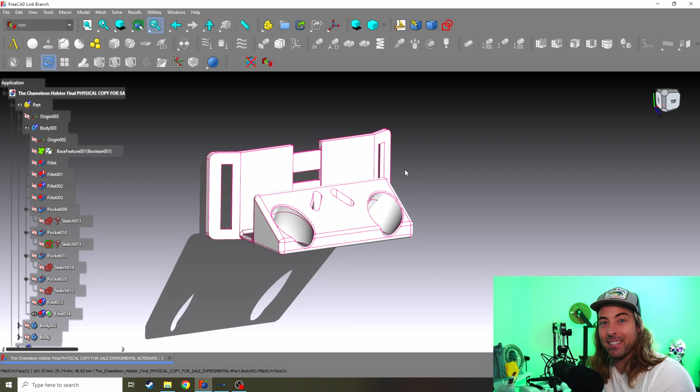Going over my FreeCAD document here. This is... this is a mess, is what it is.

Now, when you go into FreeCAD, you're going to have all these shapes, but let me see if I can... this is kind of like a finished concept. Your FreeCAD is going to look a little different. This is kind of a customized version with certain add-ons, you can see I have.

I make multiple copies as I go, and I'll explain that in a second. I want to make this as brief as possible. There's nothing I can do to say, hey, this is how I do it, just copy this.

You have to learn how to use your program, whatever you're going to use. If you're like an artist and you like CAD style stuff, but the CAD is a little too much for you, there's Plasticity. A lot of people like that. And like I said, there's Blender and so many options.

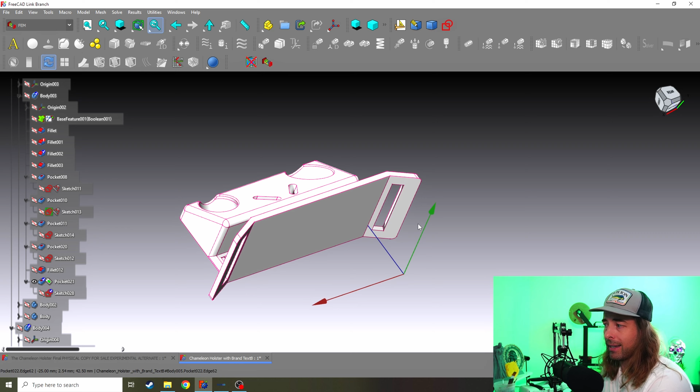So go and check out what's out there. Go look at some videos. But in CAD, this is how I went about it. I knew that I needed a shape.

All great things start out very simple. I played around with the front end first and then the back end. I kind of really don't understand how I'm going to do it, I just start doing it, you know? That's how I work, I can't plan it out. If I plan it out, it's not going to happen because I get frustrated.

Then I added this angle here, and then I added the belt loop. It's as easy as that.

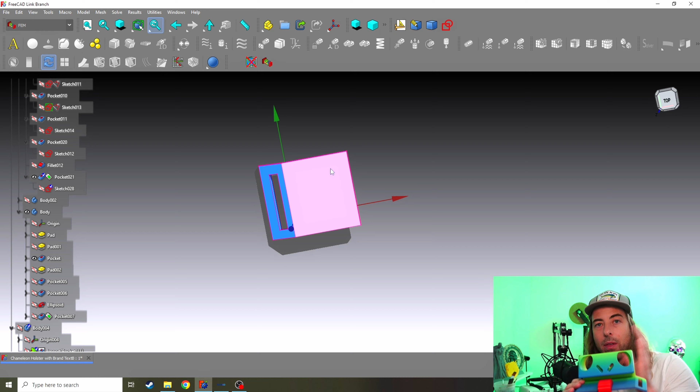When you're going to do something that's symmetrical, it's really easy. You only have to do half of it, okay? That's my message to you: do half of it, and then mirror that image, and you'll have an exact symmetrical product.

If you try to do it any other way, it gets a little complicated and you end up doing a lot of unnecessary work.

And that was my original first go at it. This isn't my first go, this document right here. This is probably like the third or fourth attempt. So this is what I did.

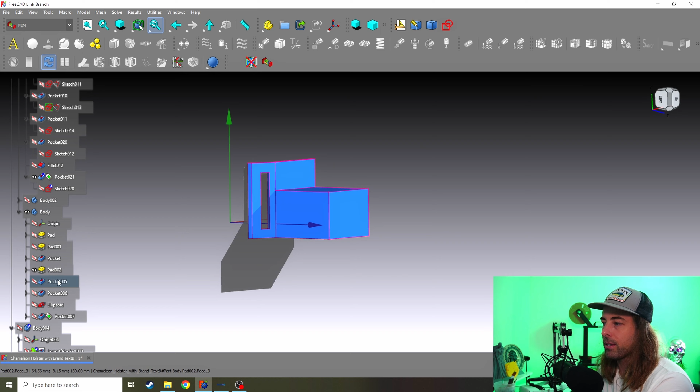I did half of it and then I started adding the block, okay? You can see the block on the side there. And then I added the pocket where I thought the smartphone could go.

All right, I just sketched over top of it, see the sketch right there? I didn't even put constraints on it, I just attached it to the edge.

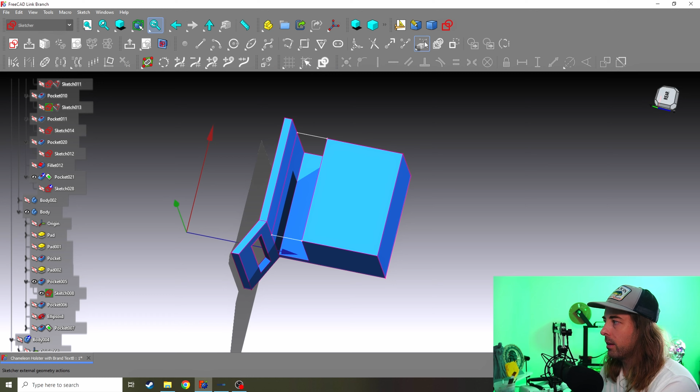There's something in the sketcher that you can use, let me see if I can bring it up. In the sketcher, you can attach to edges. Right here, the external geometry option right here.

And so I believe I used the edges and attached my sketch to these edges, and that's why it looks so perfect, but I didn't measure it. I didn't constrain it. I recommend you do, but sometimes I just run with it, you know? If it looks good, it prints good, then I don't care.

After that pocket was done, remember this is half, this is not the full length thing, it's going to have more reflected on the other side. I don't need the whole block, and it'll look stupid if it's a block.

In fact, I really wanted a round shape, but that's really annoying to print. Round things don't always print well, and you'll see that if you try to print cosplay helmets. When it gets towards the top, as it starts to round off, you'll get layers that kind of separate.

And then they'll fill those in with Bondo or whatever that stuff's called. And it kind of ruins your experience with 3D printing, because you want it to just do the whole thing, do the concept, and it's done, right? And you want it to just be one material, okay?

And so that was my goal, and that's why I decided to just make it kind of blocky. You can see it's not exactly, you know, a chameleon head per se, but it's kind of blocky. But when you're doing art and sculpture in general, you're just going for the idea of it—if people look at this, will they think that kind of looks like a lizard?

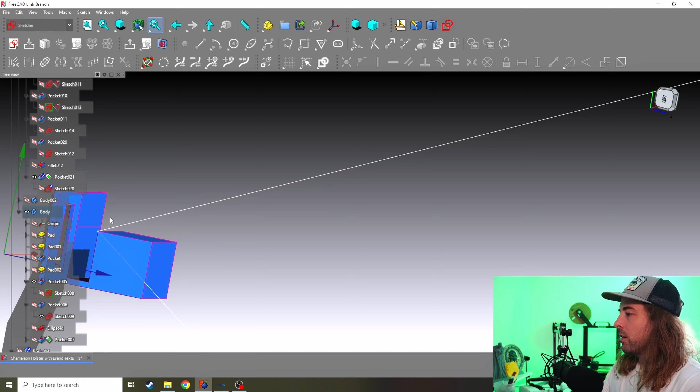What do you mean it doesn't look like a lizard? Of course it does. That's what I was going for, and I knew I could get away with it.

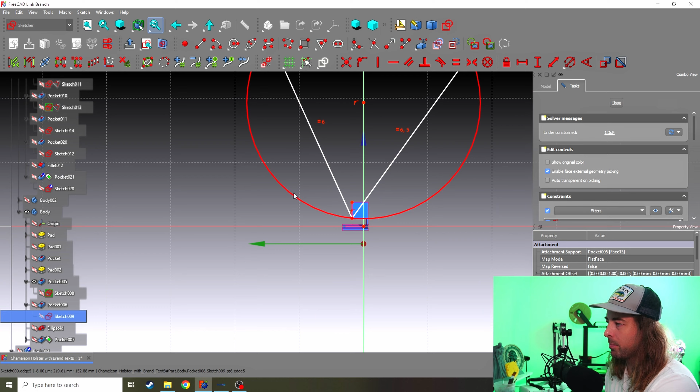So I made this giant triangle like this, and I used the point on this corner here to lock in my sketch. I use that as a reference, okay? Let me see if I can show this to you. If I double click on that sketch, there it goes, it opens it right back up. So there's the triangle, okay? This big triangle is what I used. It didn't have to be this big, you can shrink it, but like I said, I was just running with it.

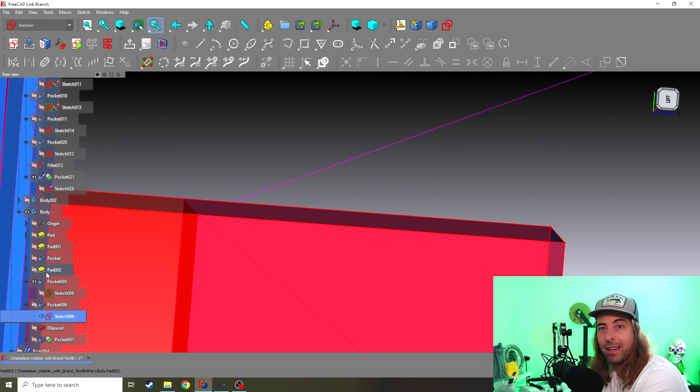So this triangle, and I figured I don't want it at a sharp angle at the bottom. I need a little bit at the bottom that I can use, and I don't want super sharp edges because in 3D printing that tends to cause things to peel up. They're really difficult to keep on the build plate. Even when you have glue, stuff happens. Fight me. So I left that like that, and then I pocketed it.

So you can see I do a lot of sketches, pads, and pockets. Those are my main tools in this program. So after the pocket, I had that sharp angle, and then I had a flat face there.

I added the hole here, okay? But this is not just a hole. If you look carefully, you'll notice it's an oval shape. And I needed that because if you look at the controller, that is an ellipsoid. It's an oval, a very tricky shape.

I had to make sure it could go in, but I also like how they designed it because it's a little bit thicker in the middle. So that means I knew that was my point of retention. All I had to do was make it so that it could go far enough that it doesn't hit this button, but it could go far enough and stop right there. So it's retained at the bottom, the bottom is too small to go past that point right there.

So I was working with this and with this. Now I did want it a little more, you know, at a, what's that called? A chamfered angle, or what's that called in gun terminology? A flared magwell, okay? If you have a flared magwell, you know how great those are, it makes it a lot easier to slide this thing.

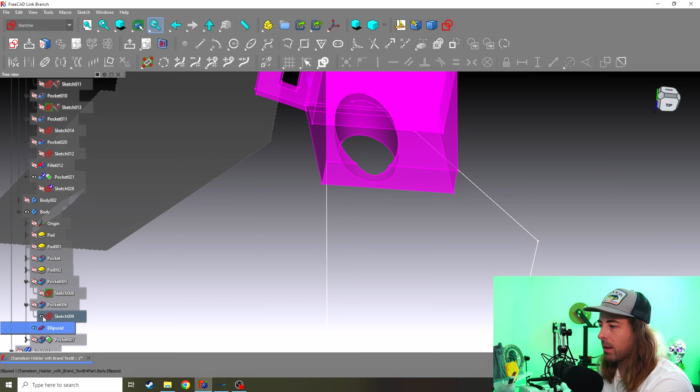So I was thinking of that, so I made it a little bit bigger than usual, and I imagine people not getting it perfectly right. So I made it a little wider, and actually I just guessed. I tried to measure it and it didn't work, so I just kind of guessed until I got it right.

You'll see my ellipsoid was a subtractive one. You can see the ellipsoid's right here, right? Now let me double click, there it is right there.

So in the part design workbench, and you're gonna have to learn all this stuff, whatever program you're using, you need to learn this is a subtractive feature, so it's a shape that it subtracts. And if it doesn't work, it's because you need to learn why it doesn't work. And that's on you, there's a lot of things going on.

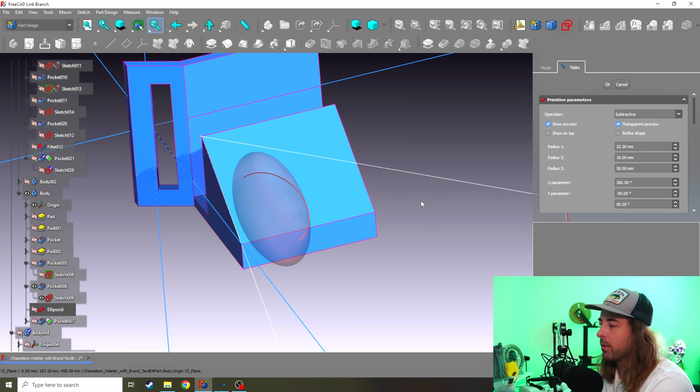Basically, this is computer aided design, right? So you got to figure out why it's not working. And like I said, it takes time, and it's worth your time. So learn your tools, learn your program, learn your platform that you're using.

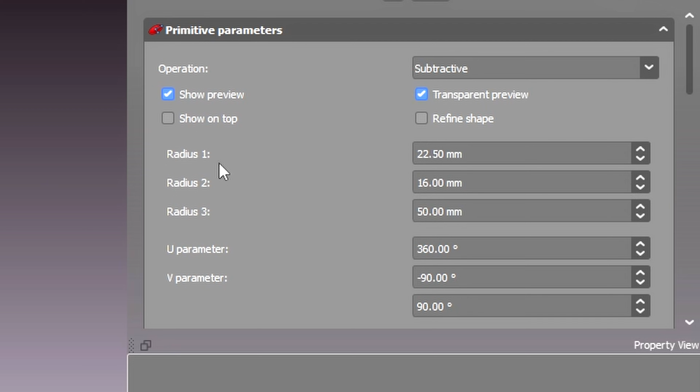So you can see I got the angle just right. And then it was going to cut out a little bit down here, it was going to cut into there, and I adjusted the hell out of this thing. I got it just right. You can see I have radius 1, radius 2, and radius 3, those are the basic measurements that I took of this.

But like I said, I needed it to be a little bit bigger to give people a little space to fumble around and slide it in. So really the bottom was the most important.

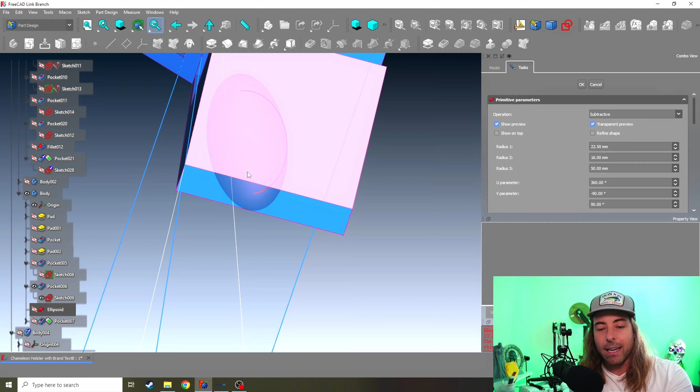I didn't really get that until I printed a few of these blocks. So I made these blocks in the beginning. Let me show you - I just printed blocks, I didn't need to print the whole entire thing. So I suggest you do that, get rid of whatever you don't need for shapes and start.

See this one? This is too high. See that? I need to have this a little bit wider. I needed to push the ellipsoid down further into here to make that work. So either way it wouldn't go down - it didn't matter. This was clearly too tight.

So I tried it again. Oh, and that one was a lot better. It doesn't smack the button on the bottom there. And then I put my hand around it. You can see I filleted it here, made it round. It allows me to pull it out. And I thought, oh, that's not bad.

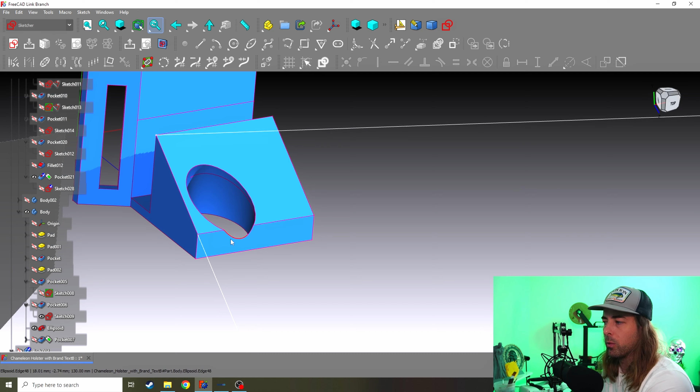And that's when I started running with that. So that's when I thought, this is good enough, I can run with that. And I had to adjust the angle just right because it was starting to cut into too much to the front, so it was too thin on the bottom, and it was also cutting into the smartphone space.

I did the nose. Now the nose is just a basic oval shape that I drew with the sketcher, this one right here. Create a slot - you click on that and you click on the surface you want it on. I had it not even attached to the thing because the thing's at an angle. I don't want an angled thing. I want a straight shot so I can see straight through it, and it's just easier to print.

I don't need it at an angle, I just wanted it to go straight up and down. It's just, I don't know, makes me sleep better at night. So that's what I did - I made the slot, and that was to save material, but also give it some character. Chameleons have noses. I printed it without a nose once, and it just looked like that. So it does matter.

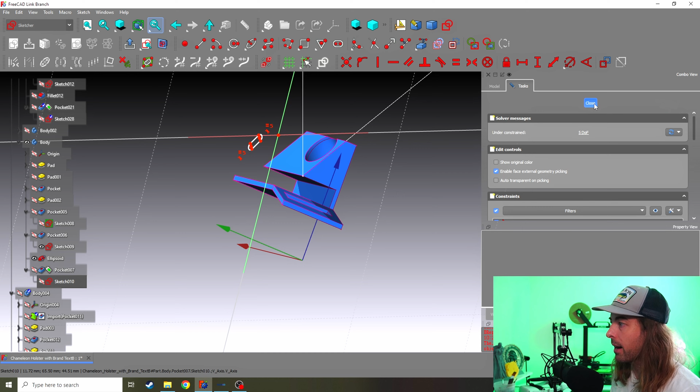All right, moving on. So that's when I had pretty much my completed block. You can see I have - so let's turn off that sketch, and turn off that sketch. So you can see this is exactly half of it right there. This is half. I was ready to go, and later on I knew I could just click these and I could do fillets later.

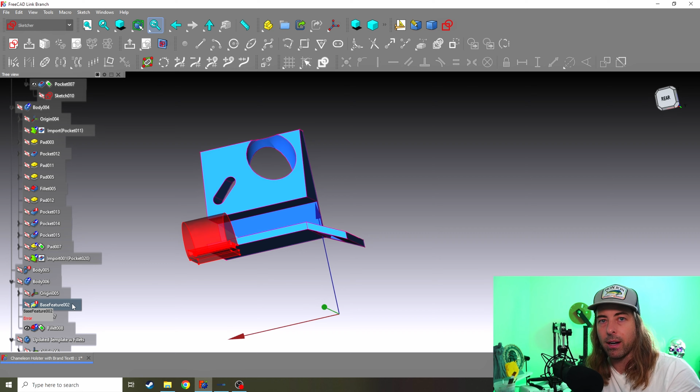I wanted to mirror that, and the way that I did that was - by the way, always save. In fact, I save each successful step, like when this block was finished, I saved that document and then I saved as and made a new name. I do A, B, C, D, going through the alphabet. That way I know where I stand in my progress, and if I need to go back it's easier to reference where something went wrong, or where I found success. So I do that to try to catalog and organize it.

So after I saved it with a new name, I continued. Let's see what body - oh shit, this is a mess, by the way, like normal CAD people would be losing their mind. So body 2, you can see it's this other side. Let's go take a look at the details. In body 2 right here, you can see I imported the base feature, which was that half. So that base feature was the imported entire body that we just completed.

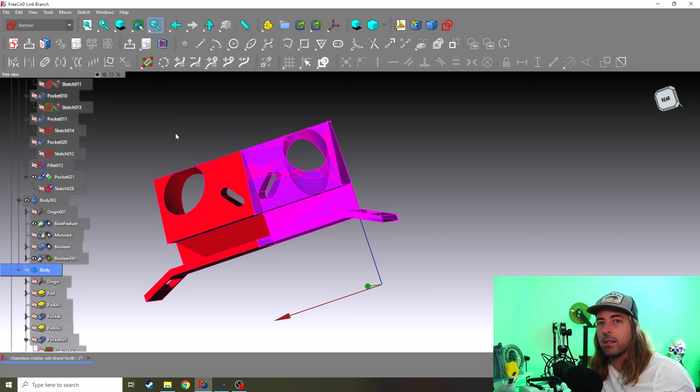Like I said, I can't show you every step, the video would be forever. So you need to go and look at - I really like Mango Jelly's videos. There's some other people's videos that are really good, Adventures in Creation, but I watch a lot of Mango Jelly. He's been cranking out content on it, so definitely check him out.

There's my base feature - I imported that and then I mirrored it right here. I chose the YZ plane, and you can see the YZ plane is right here. All right, but I think I have an offset - yeah, 140 millimeters.

So I knew how long my original block was, and I just offset it from one side negative 140 millimeters, okay? So then it perfectly mirrored, right in the middle.

This is just the way I work. I can't get it, those little things, like getting it right and doing it the right way, that gets in the way of me actually making stuff.

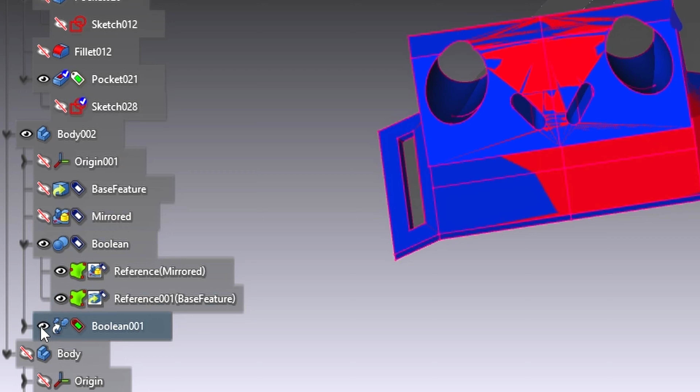So deal with it. I took the 2 halves and I combined them, and I did that with a Boolean feature. Boolean is combining or cutting stuff or subtracting stuff, it's a programming term, look it up. I selected the base feature and the mirrored, and then I made the Boolean. So that makes a new part with both of those halves.

Let's see if it shows. I gotta hide that. Okay, so that's what it did. It made it into one piece, but it's still, you can see different selectable pieces.

Now that can be helpful, depending on what you wanna do. If you wanna put a feature on one side but not on the other, you still have the different halves. It's useful, but they are together.

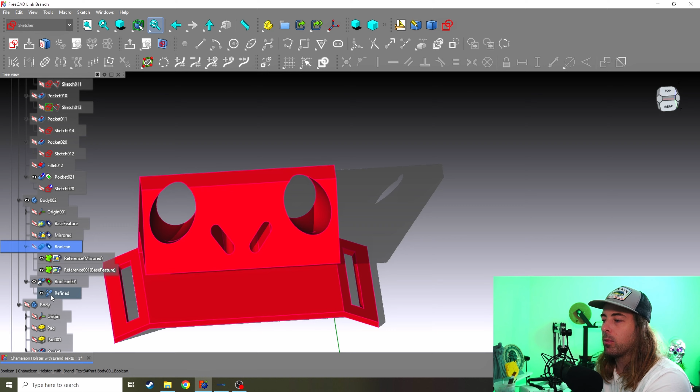So I refined the model, because it was in those 2 halves. So what I did was I went in the part bench. These different workbenches do different things for you. Part design and part, they're similar but different, okay? You're gonna need both. I'm not gonna go into how they're different or similar, but you could do things in one that you can't do in the other.

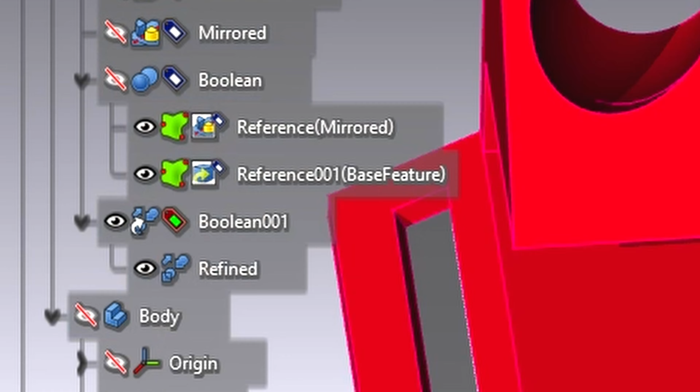So I went into here, I selected the Boolean, and I created a copy as a refined shape. So what that did for me, as you can see, it took the 2 halves and turned them into a solid shape. So that's what I wanted.

Okay, so now I have a perfectly solid shape and I printed it. And I tested it and it turned out great. So then I thought, okay, let's refine it.

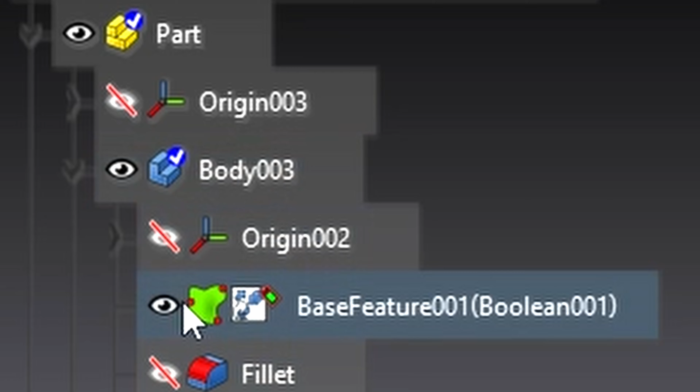Let's make it better. So here's body 3. I started a new body. I grabbed and dragged that into a new body. And that's what base feature is, okay? It's referring to the other body that I just had down here, okay?

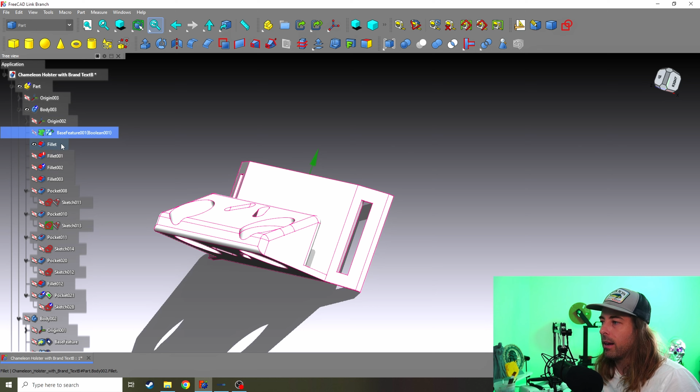So I took that refined Boolean body and I used that as the base feature for body number 3. So that's the starting point. It says, hey, look at this, take this, and we're gonna start working from that as a reference. That's how I wanna explain it to you.

So then you can see I did my fillets. I love the fillet feature, okay? In any program, you're gonna love it, okay? So you can see what I did. I selected the existing thing. You see how it was like sharp, right?

So I went around and I thought, what should I fillet, round all together at the same time? And the reason that's important is if you fillet something, but you don't fillet something else, it might not work. That other fillet that you wanted to do might not work because of the way the program is doing the geometry, it would have been easier and better for the program to do it all at once, okay?

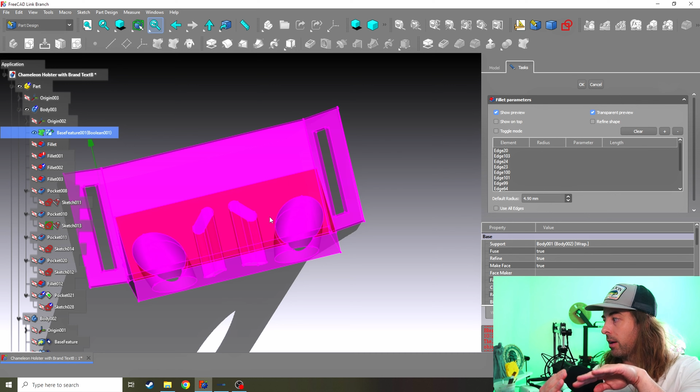And then you're gonna run into some limitations. One thing can do like 3 millimeters of a default radius, but the other one can only do like 2. So you're gonna run into issues, but you're just gonna get used to it, okay? You're gonna get used to the thing telling you no, all right?

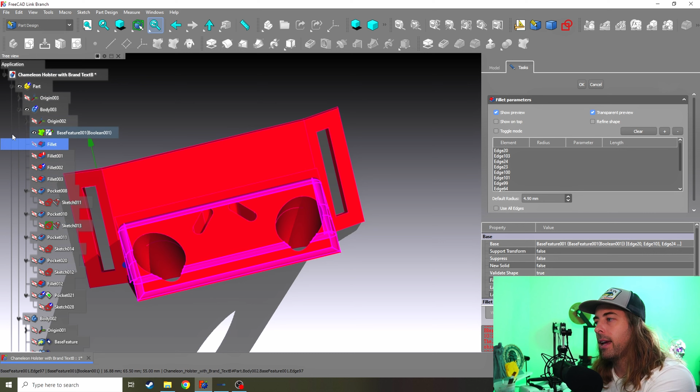That's how life works. I went around, I played around, and I said, what can I get away with? What can I do all at once to get these rounded edges that I love so much, and everything just keeps falling down. I went in and I filleted these.

You can see these purple default settings, mine have a different color. So if you download FreeCAD and it looks different, don't worry, it's the same thing. I just customized mine. But look, so when I filleted the top here, you can see how much it shaved off. That's a lot, so you need to take that into account.

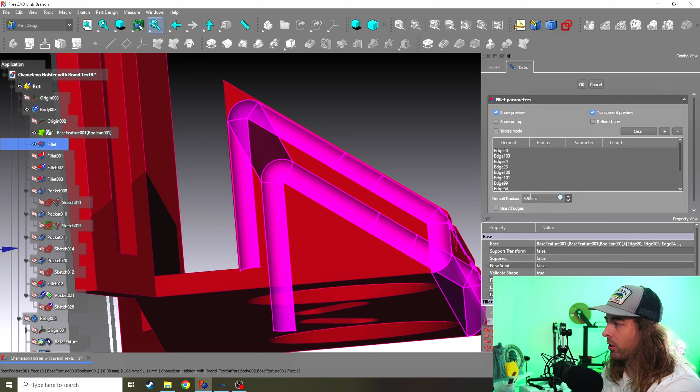I was fine with it. I was like, whatever, you know, I was just winging it anyway, like I usually do. That's gone, all right.

Now you can adjust the radius here, and you can see all the edges that are included. You can subtract these edges, remove them with a minus sign, or click on other ones and add them. You can do whatever you want, but the default radius, if it gives you an error, it's going to show up here. Just relax, maybe take one of them off and do one first, then try the others. You're going to figure it out, trust me, it's just all experience really.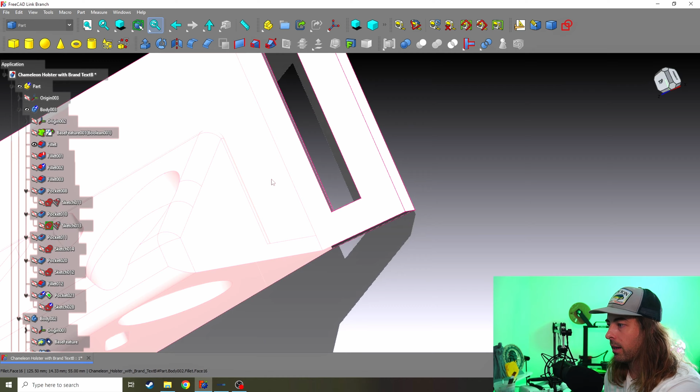So that was the first fillet that I did. I did all those edges and it made it look real nice. Now in hindsight, in retrospect, I updated this. I did it a little differently and was able to do something I couldn't do before because I didn't include this part right here and this part right here. Also I could have included here. Fillets are very important, fillets and chamfers, okay?

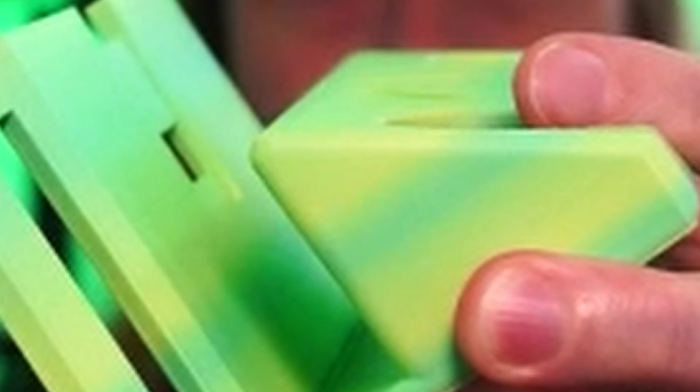So I went back and you could see that it's like straight right here, flat. It actually cracked because it was a weak point, it's thin right here. I went back and filleted it a little bit differently and was able to fillet this inner part right here as well as this inner part right here. So now they're curved, a little more curved, so that reduces the chances of it snapping.

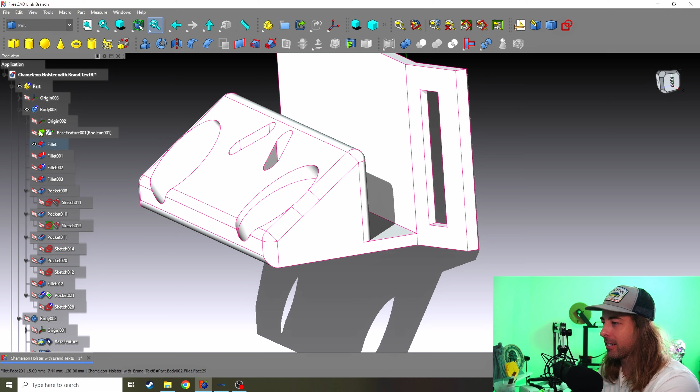You're learning all kinds of things today. I know this video is going on and on and on, but you know what, I might not ever talk about this stuff ever again.

Let's keep going. So fillet, where did I fillet after that? You'll see it gives me errors later and I just ignore them. Pro tip: if you keep making stuff and it gives you errors after the fact, you can hit F5, highlight the part, hit F5 to recompute, and if it doesn't do it, just cancel and keep moving on. Just ignore it, everything's fine.

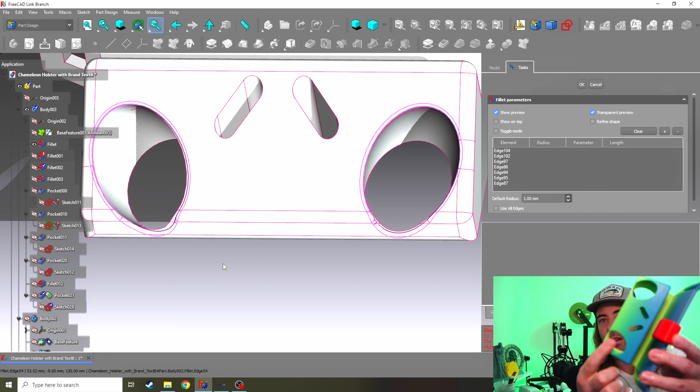This fillet, I wanted these little eye holes, these little eyelets, whatever they're called, to be a little bit smoother, like I said. In firearms you'll have the... dang, what was that called? I can't remember, I'm not very good at English. This is the fastest I've talked in years.

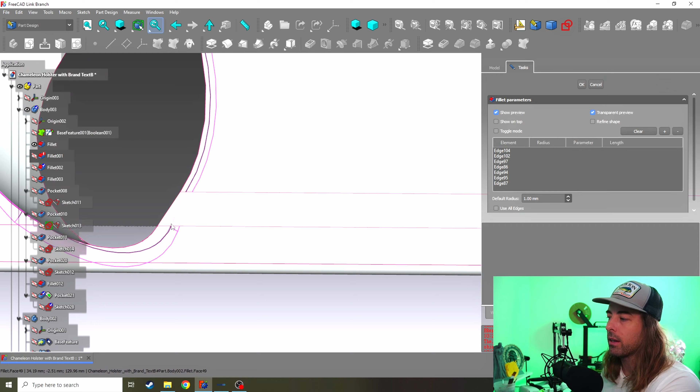You want a bigger opening. Damn, what was that called? I had brain damage, all right, no joke. So there's that fillet, okay? But remember what I was telling you about how the computer has to calculate and make decisions for you? This is one of those decisions. You can see how much it's going to cut into it with a default radius of 1 millimeter, so the radius of that curve is 1 millimeter.

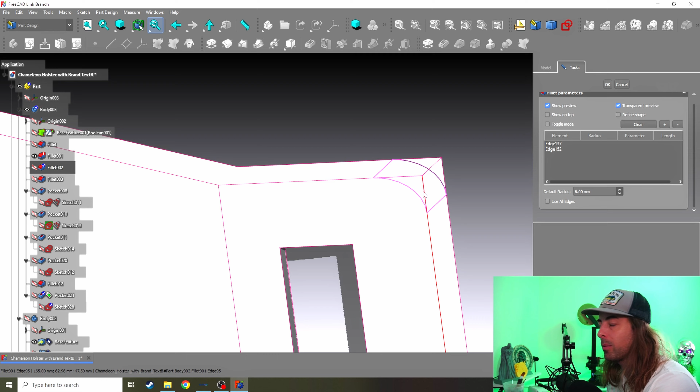So then I rounded off the top, I didn't want them all sharp. If your arm bangs into that thing or your hand clips it, some kid's going to cry and I'll get sued. So I filleted the top corners there and I was just taking it slow. You can do them all at once or one by one. And then I did the bottom ones here, that's what that next fillet is.

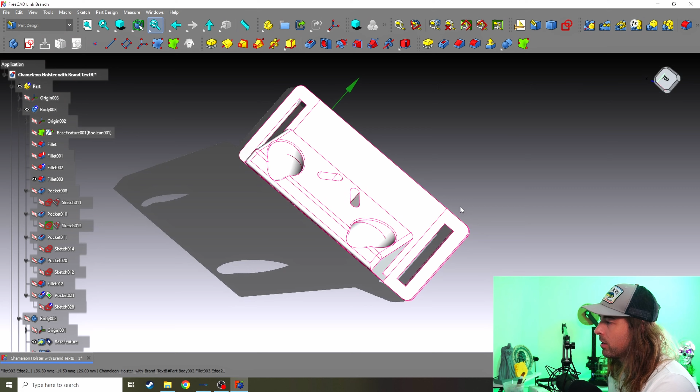And then I started to think this might affect the ability of this to print flat. I'm taking this from a 3D printing perspective, not animation or game perspective, that's my whole angle with the whole thing. I always keep that in mind: is this going to print? Can I print this flat without supports? Because that's when it becomes hell.

So I was looking at it and thought I might have to pocket into it, like shave a little bit off the bottom by cutting into it, nice and flat with a square sketch. Then I started doing the crazy thing.

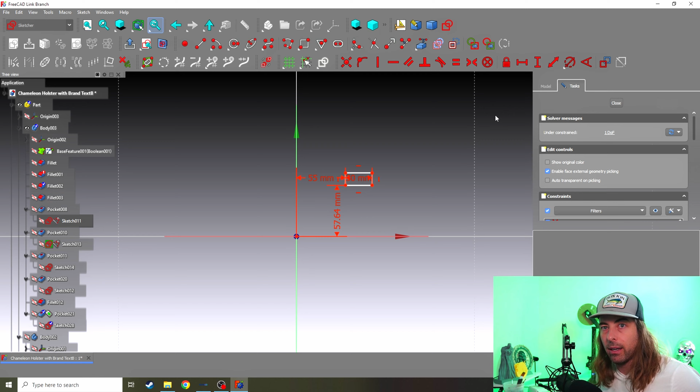Now the part that took me the longest to do was getting this little clip-on hole and tongue just right. I'm going to try and wrap it up because I can't go through and explain all the details of how I did this. Let's just say it was a lot of work and it took more than a month.